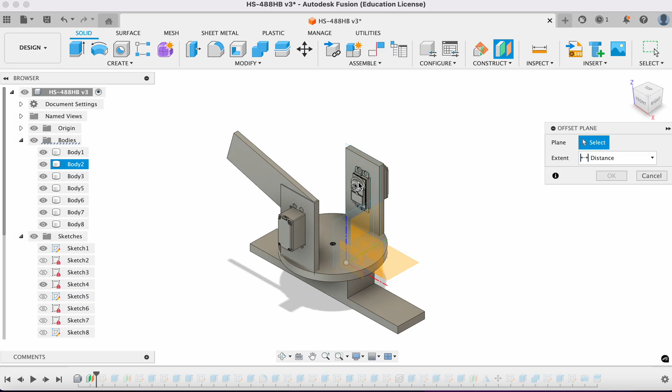And the next thing you're going to want to do is click that offset plane. So we have this plane, and we want to use this one because it's facing the direction, if you look at it, that we want to be facing to attach things to our servo. So we're going to click this, and if you notice right here, this has a little arrow. Anytime you have one of those, I implore you, please click that.

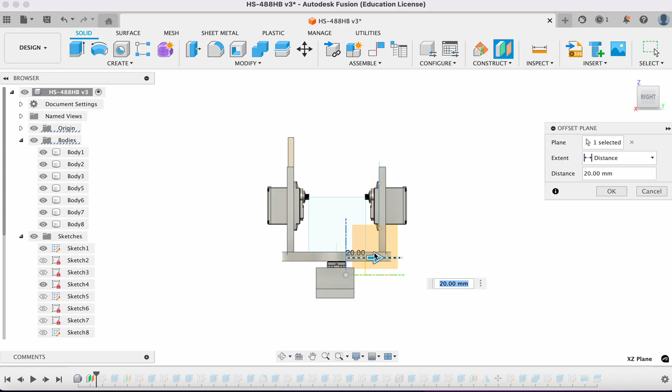Now we have our plane. If the origin's getting in your way, just remember you can always make that go away. Come over here, it looks like our plane is down here, and that's the one we're going to draw on. So we're going to create a sketch. Now it's going to be kind of hard to know where to place this because I can't see into here.

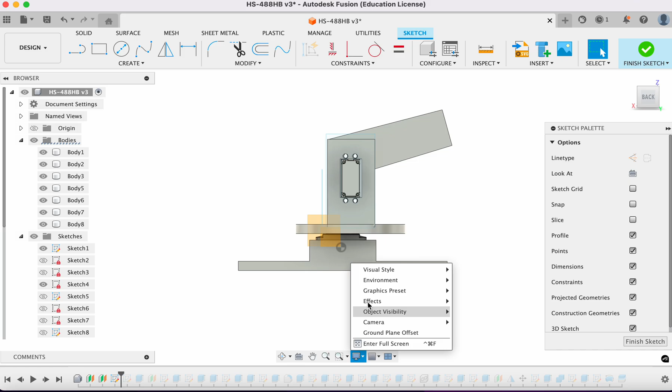So what I want you to do is click Visual Styles with Shaded Hidden Edges. So that means we're going to get this nice shaded sort of backdrop, but we're also going to get the hidden little components down here. The next thing we're going to use today is going to be this slot tool, center to center. The reason we're using this is because it comes with some baked in references that we'd like to use.

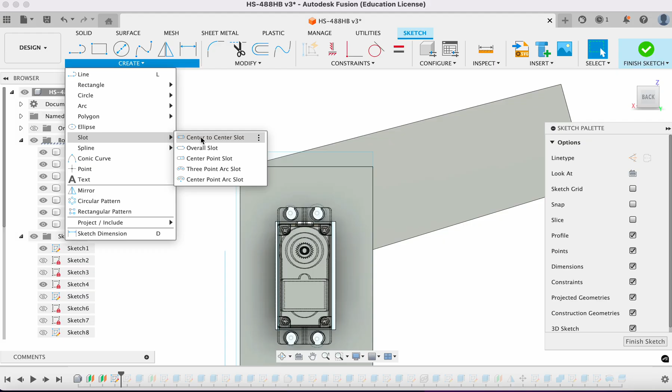So one of them is a center point, and that's where we're going to click. We're going to click right here where that servo is, and then we're going to scroll out just a little bit. And we don't want to get too big with this. I would say 125 is plenty, but you want to be kind of parallel to begin with, and it's just going to make it easier.

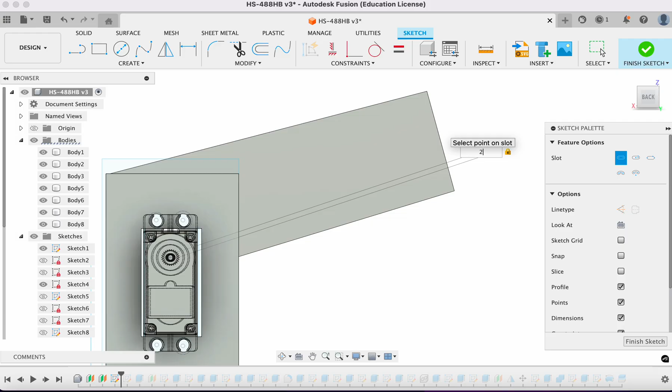And in here, I want to try and make these, let's say 20. Is 20 going to be too thin? Yeah, 20 is pretty thin. Let's give ourselves more room than that. Let's say 30. Let's go back. Say 30 millimeters. That looks pretty good. So we have 125 by 30 millimeters.

The next thing I want to do, which we haven't been doing, is I want to put in the holes that we're going to use to drill. So we're going to make those holes 5 millimeters. And if you looked, it snapped right on that point. I'm going to do that one more time. We're going to come over here, and at the end point here, it's linked now to that end little point. We're going to do this a few more times if you don't notice it. But what I want you to do is click 5.

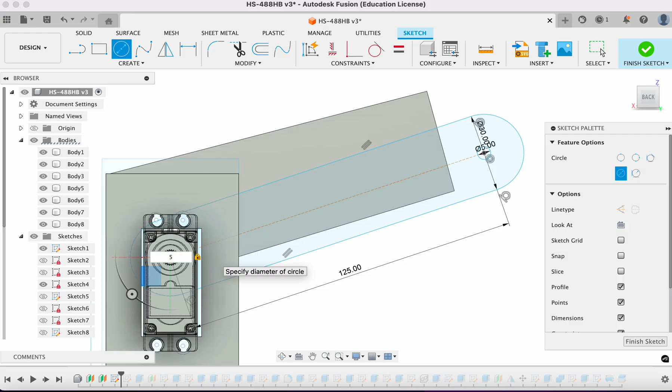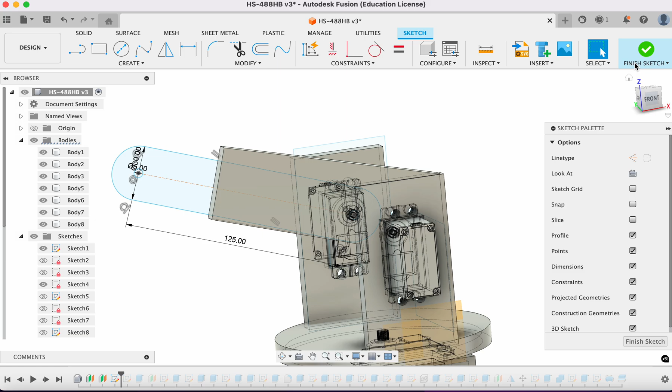The reason we're putting 5 in is not only because it's the standard I have for a bunch of screws, but also it's going to attach really nicely here. And it won't allow this to fall in. And this will have a hat on it, and there will be a little wiggle room. We're going to call that tolerance. You'll learn all about what that is. But for now, it just gives us something to use that's going to be useful for later on. So we'll click Finish Sketch, and we're going to extrude this.

And unlike last time, we're not going to extrude 5 millimeters. We're actually going to extrude this in this direction 10 millimeters. So let's type in -10, and if you look, it already gave me the hole, and we're all set. Now, if we wanted this to pop right onto there, it'd be around 7, and we can make it go the other direction for the hole there, but I actually want this to be just like this because we're going to use something called a set screw to tie this down not only to the servo, but also the little hat, that little armature that's going to go on top of here.

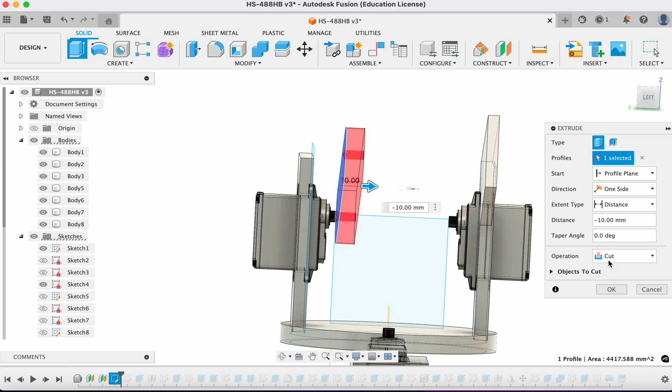And we're not going to cut. We're going to make a new body, so it should be gray, and we're going to click OK. So that is your first armature that's attached to this. Super helpful. The next one we're going to make is going to be attached to the other servo, and you have to stay tuned for our next tutorial for that one. But for now, just practice doing this one part.